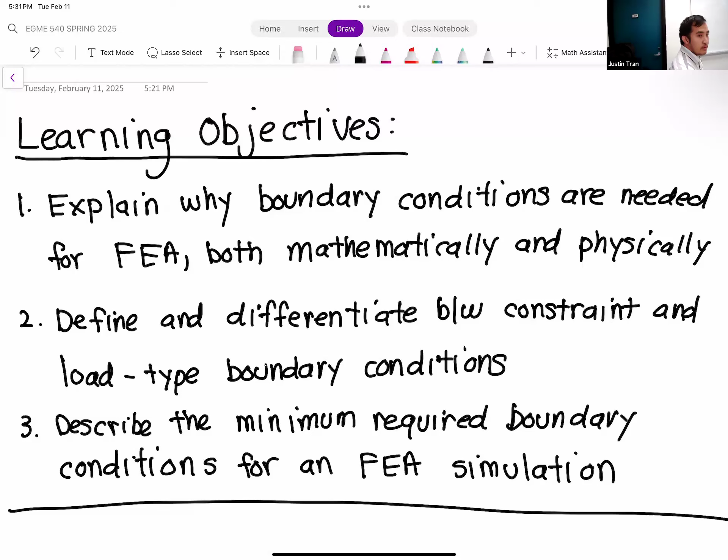Okay, all right, so let's go ahead and get started. So the topic for today is boundary conditions.

So, like I just mentioned, we're going through all of the basics that you need to even get started with FEA. Today we're doing boundary conditions, and Thursday we're going to be talking about material properties. Again, these are all things we've done in the activities, but I want to keep the activities rolling and we're catching up with the lectures. So last time we had a lecture, a week ago, we talked about meshing. So after you mesh your geometry for your finite element simulation, the next step is to apply boundary conditions.

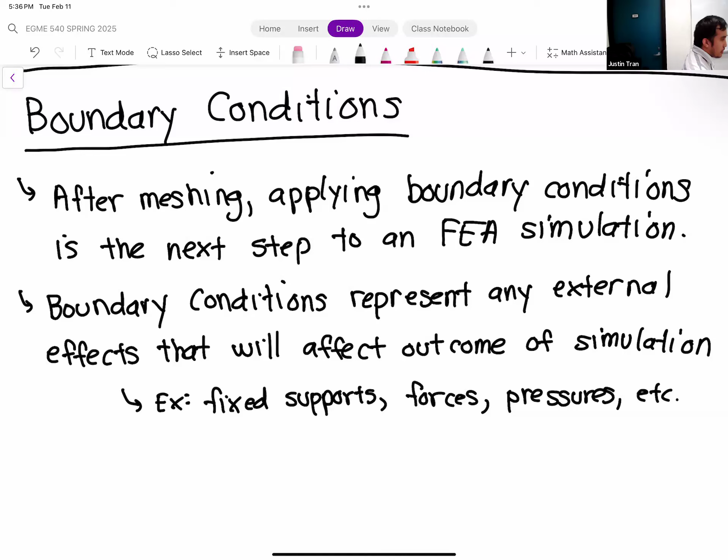I think that's a good place to start, because it kind of physically makes sense to people running a simulation. But boundary conditions actually serve a mathematical function as well. Mathematically, boundary conditions are needed to fully specify the solution to the differential equation that you're solving.

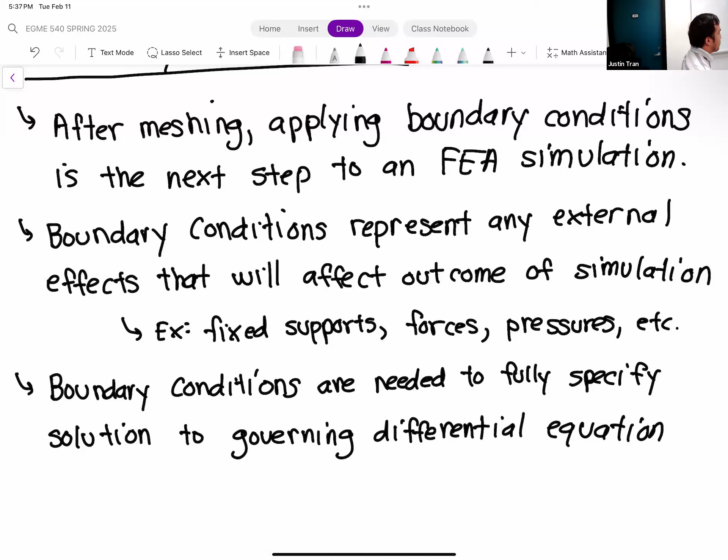If you think back to when you learned about differential equations, you always have to apply things like initial conditions or boundary conditions to solve for the solution. Let me show you an example — let's look at a very simple differential equation here.

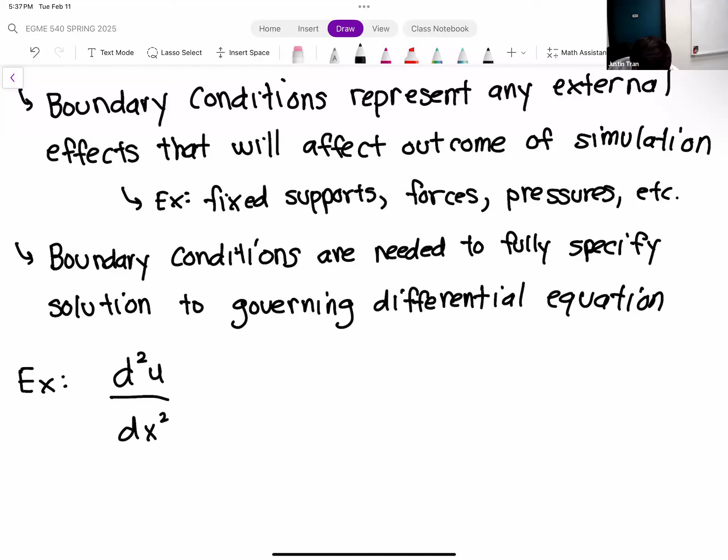So let's say we have d squared u dx squared is equal to 3x squared. A very simple differential equation. We don't even need the characteristic equation or anything fancy here — we can just integrate to find the solution.

If we integrate once on the left-hand side, we get du dx — that integral cancels out with one of the derivatives on the left-hand side. On the right-hand side, we take the integral of 3x squared, so that's going to be x cubed, using the inverse power rule.

But since we're performing an indefinite integral here — an integral without a lower bound or an upper bound — remember, in these situations we have to add an arbitrary constant. We have to add a C1 to the solution here.

Okay, and then if we integrate this again, we can solve for u of x. If we integrate this again, we have u of x is equal to 1/4 x to the 4th plus C1x plus C2.

Don't worry, this class is not going to transform into a math class all of a sudden. I'm just using this as a quick example. ANSYS is the focus of this class, but I'm just bringing this up to show you the applications.

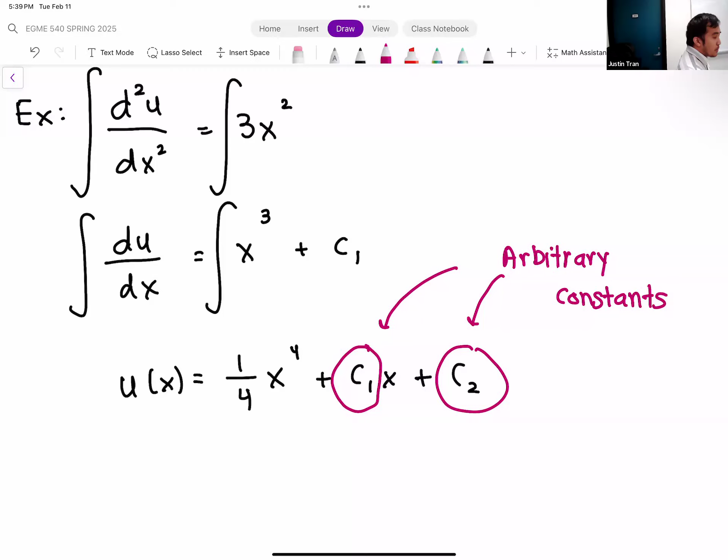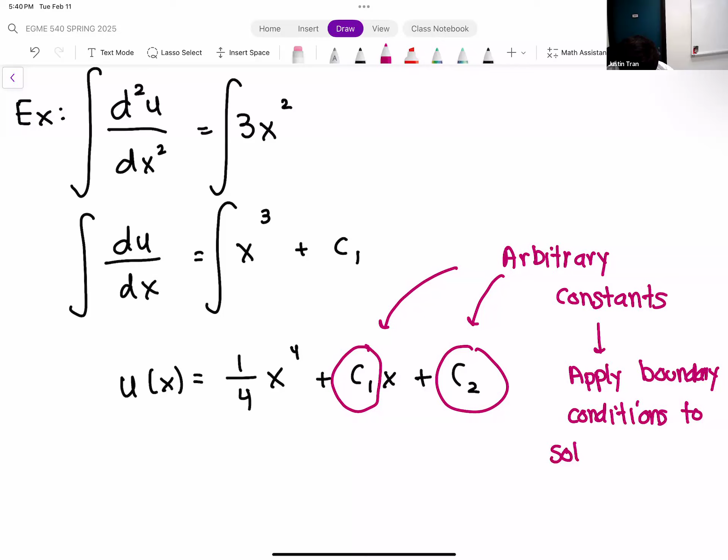And the way that we solve for these values is if we apply boundary conditions. For instance, let's say that we have a boundary condition: let's say u of 0 is equal to 18. In other words, mathematically what we're saying is that when x is equal to 0, the function u must have a value of 18.

So we're basically forcing this to happen. We're saying that through this boundary condition, we're forcing this function to have a value of 18 when x is equal to 0.

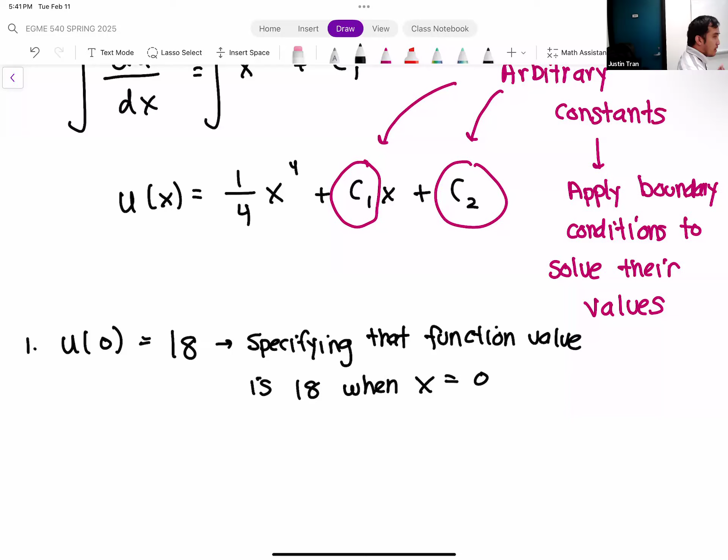So let's go ahead and plug it in and solve for one of the constants here. If we say u at x is equal to 0, I'm going to take my general solution above and plug in x is equal to 0. We have 1/4 times 0 raised to the 4th power plus C1 times 0 plus C2, and this has to equal 18.

Okay, so luckily this is pretty easy to solve because everything with the 0 is just going to cancel out. So we have 1/4 times 0 to the 4th power, that's going to go to 0. C1 times 0, that's also going to go to 0. So what we get from this boundary condition is that C2 must have a value of 18.

Okay, so we specified one of the values of our constants through this boundary condition. So now we know that C2 is 18.

All right, and then the other boundary condition that we have is, let's say du/dx at x is equal to 10. This is equal to -5.

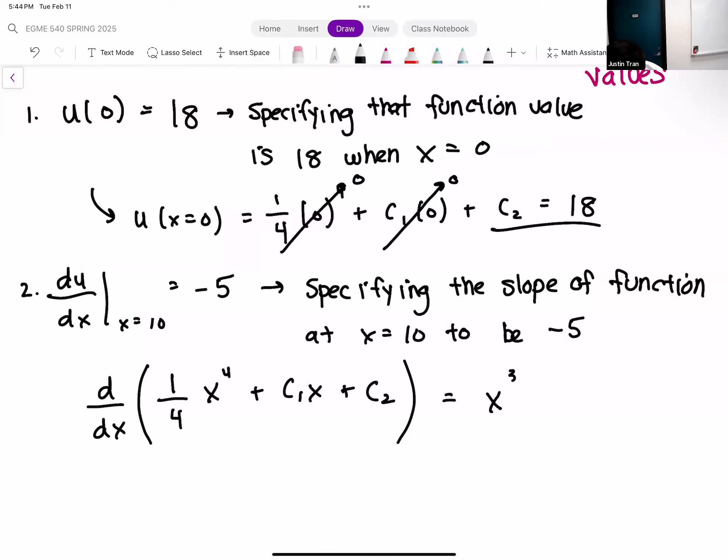Now we're going to plug in x is equal to 10, so we get 10 cubed plus C1, and this has to equal -5. 10 cubed is 1,000, so 1,000 plus C1 is equal to -5. And so we can see from algebra that C1 is equal to -1,005.

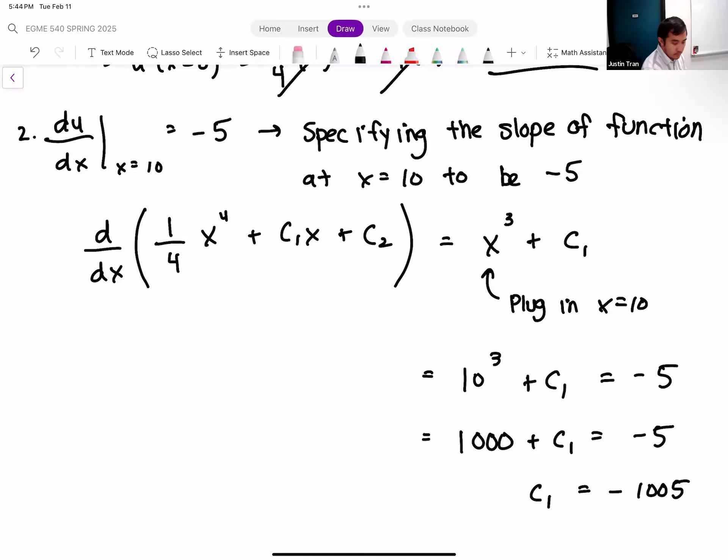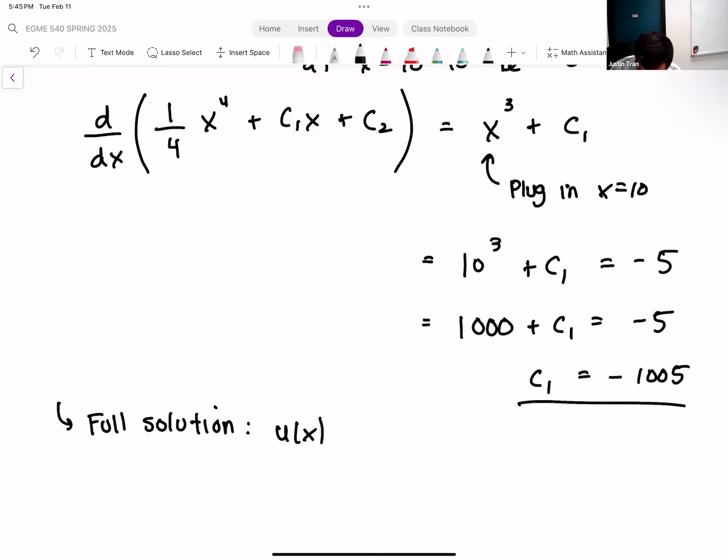Okay, and so if we plug both of these in, we get our full solution. We have u of x is equal to 1/4 x to the 4th minus 1,005x plus 18.

So in this problem, we can see that the boundary conditions played a very important mathematical role, because without the boundary conditions, we wouldn't be able to specify the values of our arbitrary constants C1 and C2. All right, any questions on this example here?

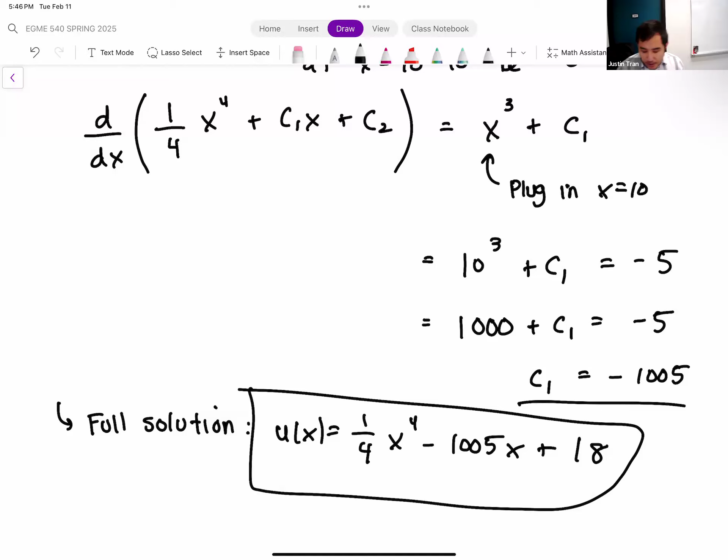Okay, good. All right, so I brought up this example kind of for another reason. If you notice from the two boundary conditions that I specified here, they do look different from each other. One specifies the value of the function itself, the other one specifies a value for the derivative. And that actually is kind of a good segue into the next part, which are the types of boundary conditions.

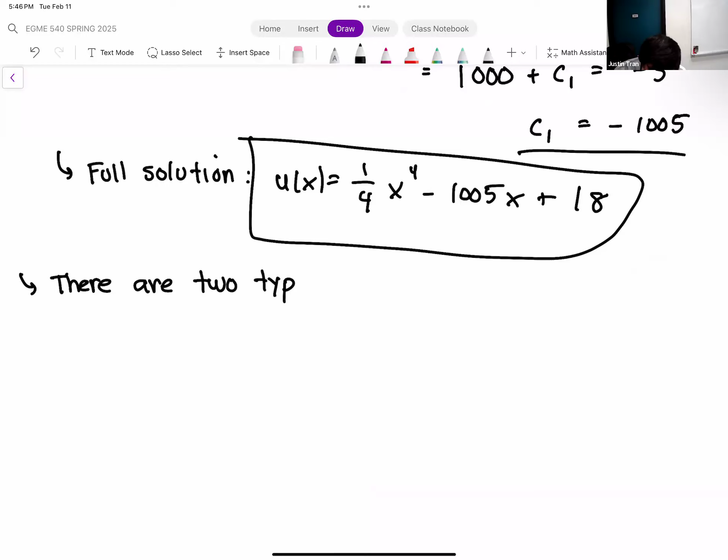So there are two main types of boundary conditions that we are going to concern ourselves with. The first type of boundary condition that we'll go over are called constraint type boundary conditions. Sometimes you'll hear me call constraint type boundary conditions Dirichlet boundary conditions. So Dirichlet is kind of the way that I was taught, but it's also not very descriptive in terms of what that is.

And if you've known me for any long period of time, one of my pet peeves in science in general is that every famous scientist wants to name the equation or theory after themselves. Like Bernoulli's equation or Newton's laws of physics, right? But I hate that because it doesn't describe to you what that thing or equation does, it's just very narcissistic of the scientist. So I hate it when scientists name things after themselves. So I'm trying to change things, so I'm going to try to call it constraint type boundary conditions, but I learned it as Dirichlet, so you might hear me kind of slip and say that every now and then.

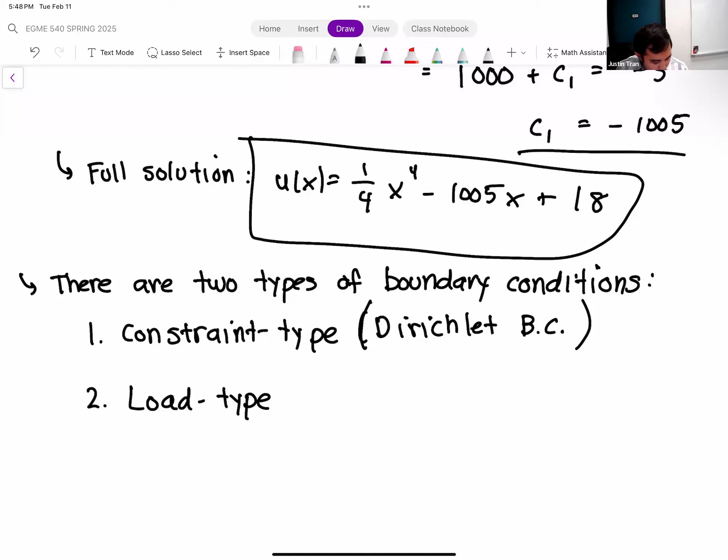Okay, the second type of boundary condition that we're going to go over are called load type. And the fancy name for load type boundary conditions are Neumann boundary conditions. Now, obviously, these are named after the people who formalized the theory behind it. So, Edward von Dirichlet and Jason Neumann - I just made those names up, I don't know what they're first names actually were.

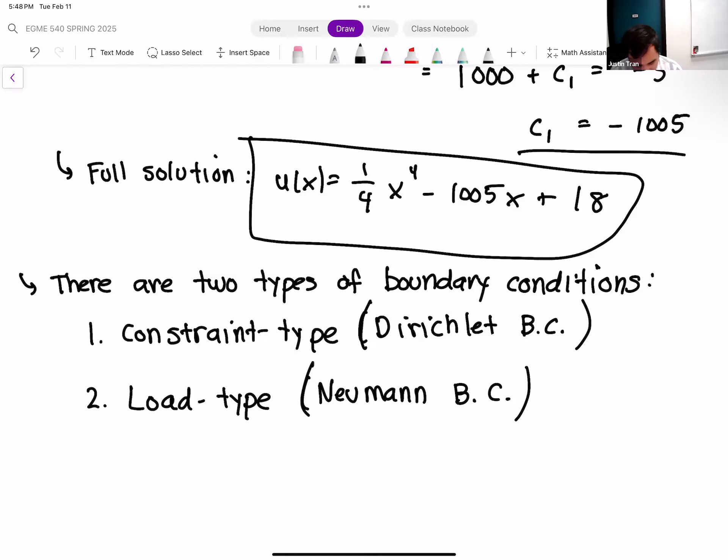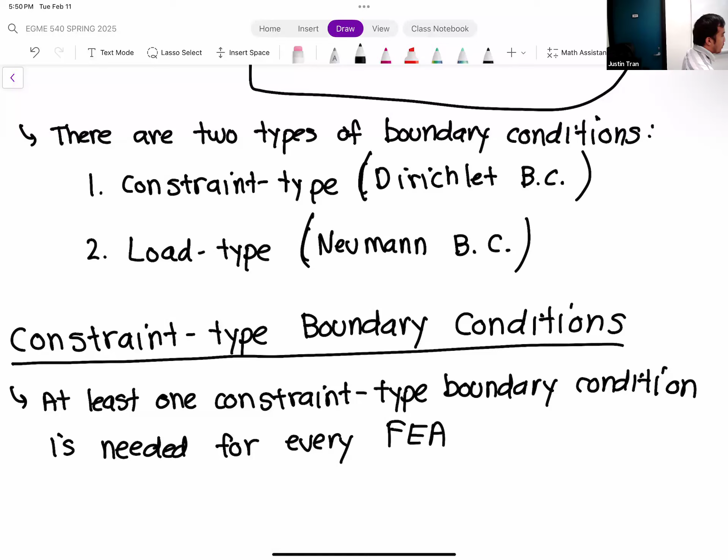Okay, so let's go over constraint type boundary conditions first. Constraint type boundary conditions are very important, they are needed in every FEA simulation. So every FEA simulation that you run, you need at least one constraint type boundary condition. That's one thing to remember. And in fact, if you don't have a constraint type boundary condition in your ANSYS simulation, ANSYS actually won't even let you run the simulation at all. So what is a constraint type boundary condition? A constraint type boundary condition is basically one that forces the primary solution variable to hold a certain value.

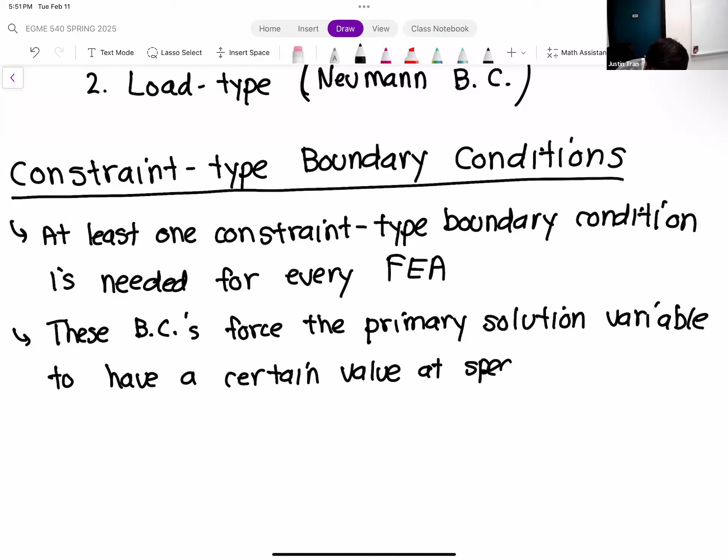Remember, we discussed a few weeks ago this idea of a primary solution variable. Every type of FEA simulation has a variable that's solved for first. For a structural simulation, the first thing that's solved for is the deformation. So we say that deformation is the primary solution variable for structural simulation.

Other examples of the primary solution variable: for a heat transfer simulation, the primary solution variable is temperature. For a fluid flow simulation, the primary solution variable is velocity. For every type of simulation you're running, it's good to be aware of what the primary solution variable is. For this class, for most of what we'll do, it's deformation.

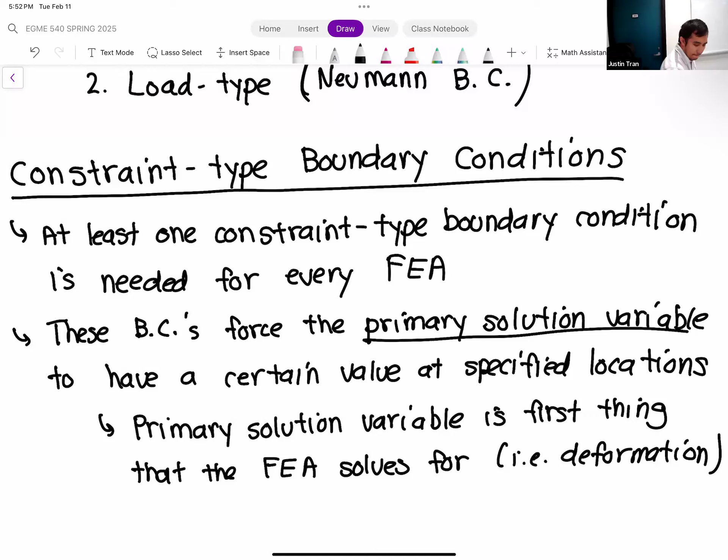A constraint type boundary condition basically enforces or forces the deformation to have a certain value at whatever locations you specify. We've used a constraint type boundary condition in both of our activities so far. It's also the most common one you'll use in all your simulations, which is a fixed support.

A fixed support boundary condition is one where we're basically enforcing or forcing the deformation to be zero at the locations where we specify the fixed support.

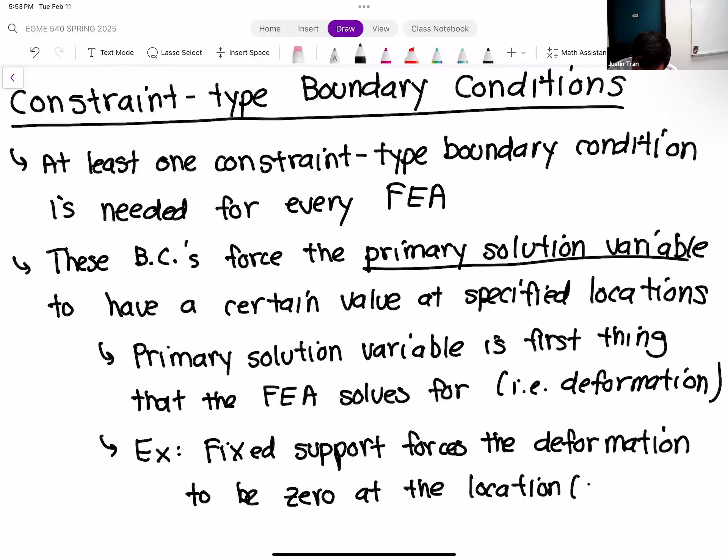That's probably the most common example of a constraint type boundary condition. Fixed support forces the deformation to be zero, and zero is a valid value. Any boundary condition that forces the primary solution variable to have a value, and you directly specify that value, so you have to be in control of what that value is, that is a constraint type boundary condition.

Linking back to the example we did earlier today, one of the boundary conditions we used was a constraint type boundary condition. If you look at the first boundary condition, u of 0 equals 18. Here our primary solution variable is u, that's the first thing we're solving for in the problem, that's what our solution turns out to be. So with this boundary condition where we're forcing the value of u to take on a value of 18 when x is equal to 0, this is kind of the textbook definition of a constraint type boundary condition.

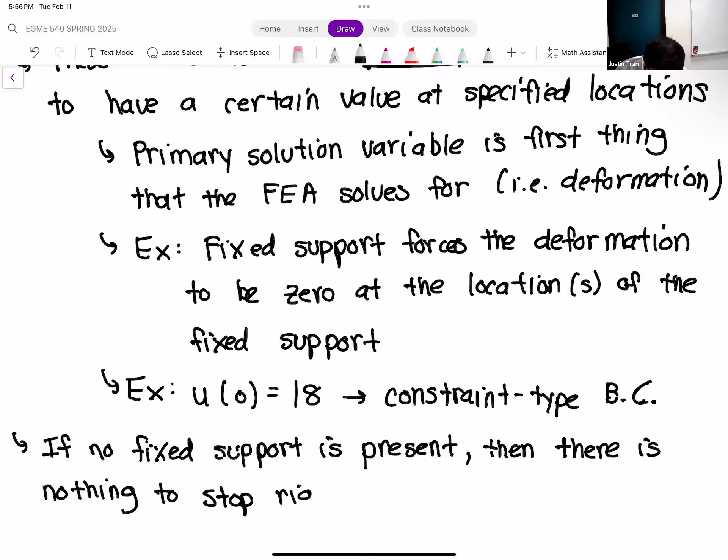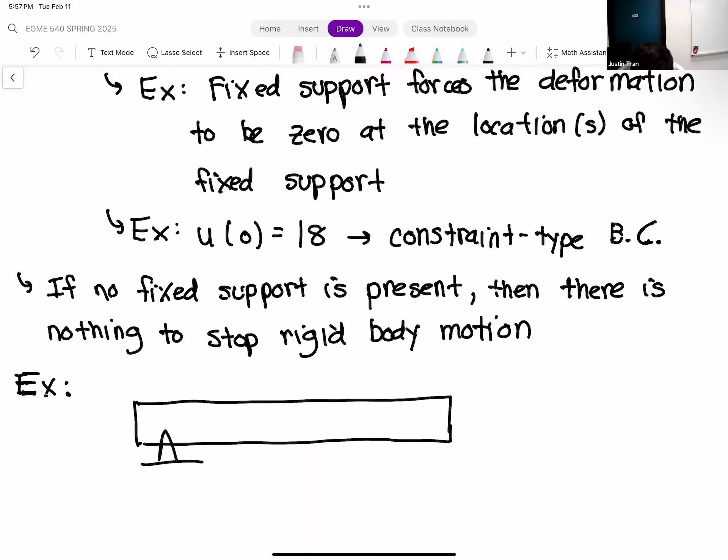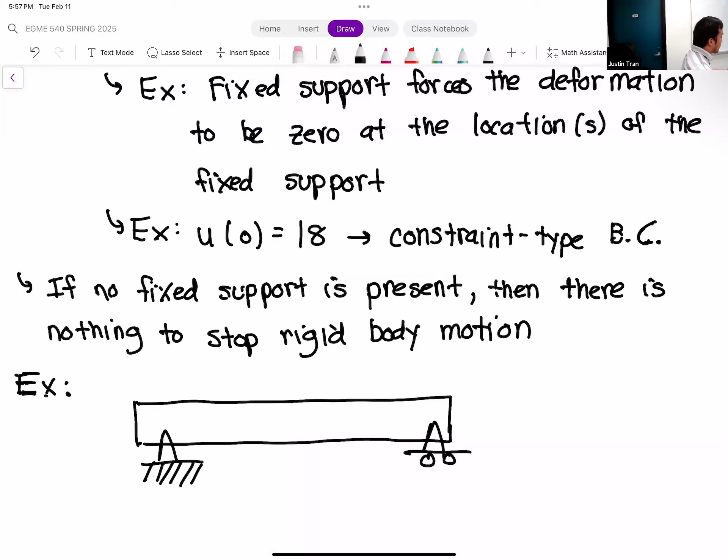For example, let's say we're doing a very simple simulation of a beam. A beam looks something like this. Normally the beam is fixed to the ground with some kind of pin support or fixed support, we'll say it's a pin support here. The other side can be a roller, that's fine. The fact that the support on the left is fixed to the ground prevents this entire beam from moving and translating.

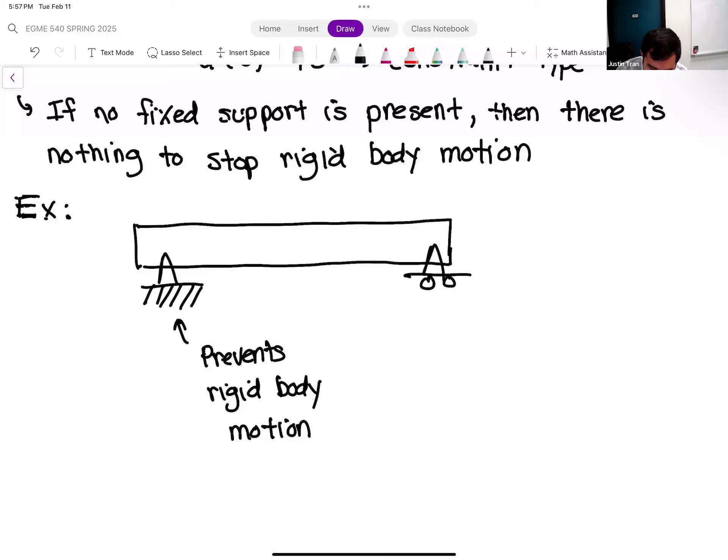If we apply a force going in this direction, the beam would deform. Because of the roller support on the right, the entire beam should compress and kind of squish, but the entire beam is not going to roll away or translate away because of that fixed support.

When you're running your simulations, it's usually hard to forget, but it's important to remember the role it plays. Make sure you always have at least one fixed support. If you don't have a fixed support boundary condition in your simulation, ANSYS will throw a fit and tell you that you can't do this.

There are other ways to fix your model, so you don't explicitly need a fixed support. But there needs to be enough constraints on the model itself to prevent any kind of rigid body motion.

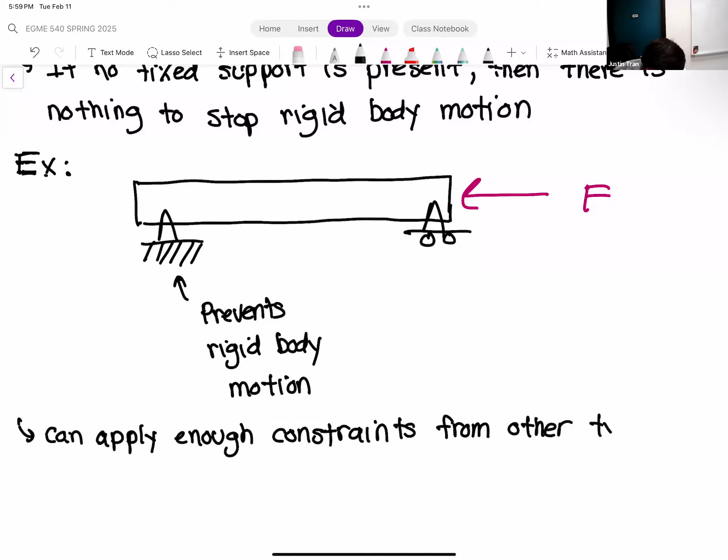So it's possible to provide enough constraints from the other types of boundary conditions. Technically, you can actually do it with force loads as well, but normally it's very difficult, especially for more complex cases. But there is another type of constraint boundary condition that you can do. We're not going to use it too much in this class, but sometimes it makes sense for certain applications.

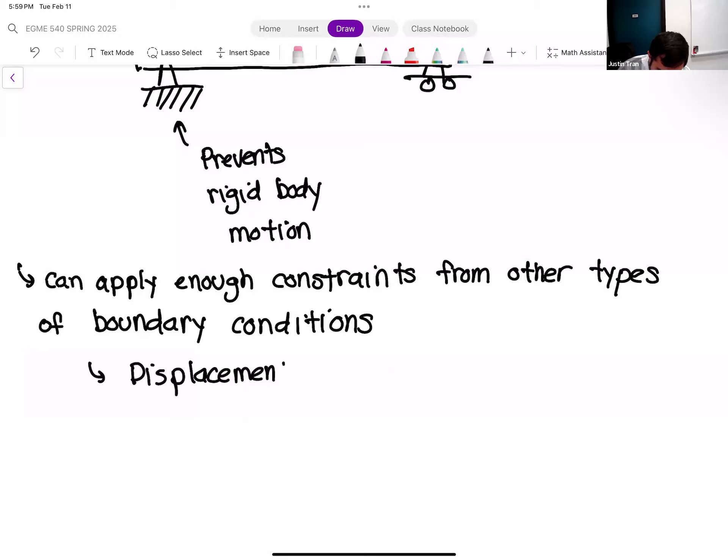So another constraint type boundary condition that is available in ANSYS that does make sense in some situations is what's called displacement boundary conditions.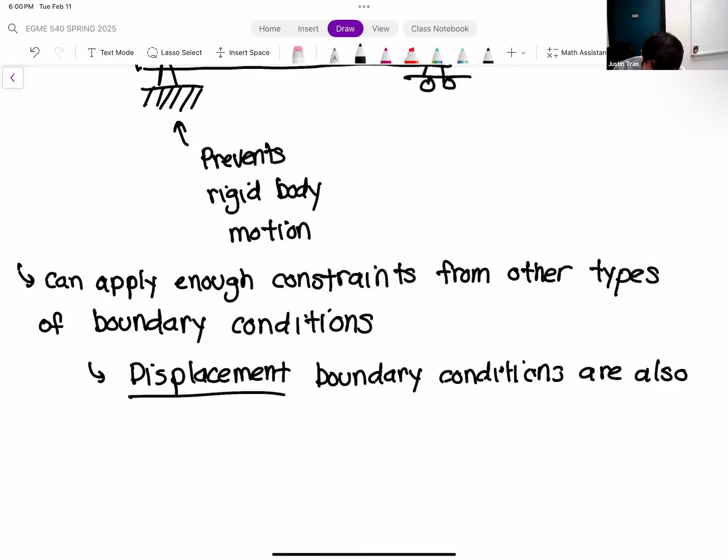So it is possible to use all constraint type boundary conditions to fully constrain your model. It's just a little bit more complicated. So the simplest thing is usually to apply a fixed support. And a lot of times physically that makes a lot of sense too when you're thinking about how your model is kind of fixed in reality.

But sometimes it doesn't. And so actually, a few people asked me last week, instead of a fixed support, what if we apply a cylindrical support or a displacement support on the three holes that fix the bike rack? And yeah, that's definitely possible. So some situations may call for certain things, but usually a fixed support is kind of the simplest way to accomplish this.

Okay. Any questions on this so far?

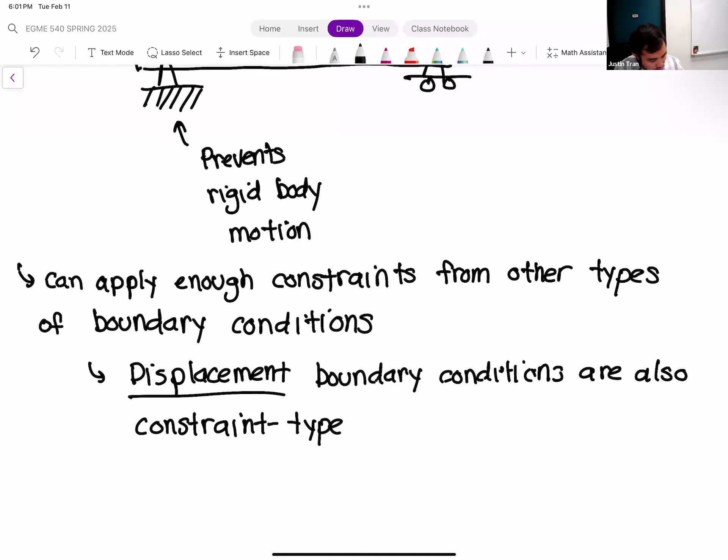Okay, so that's constraint type boundary conditions. Let's move on to the next type, which are load type boundary conditions.

So load type boundary conditions, the majority of the other boundary conditions available to you in ANSYS fall into this category of load type. It's kind of hard to come up with a definition that encompasses everything, but the best one I came up with is just any kind of external effect that's going to have an indirect impact on your primary solution variable. I count those as load type boundary conditions.

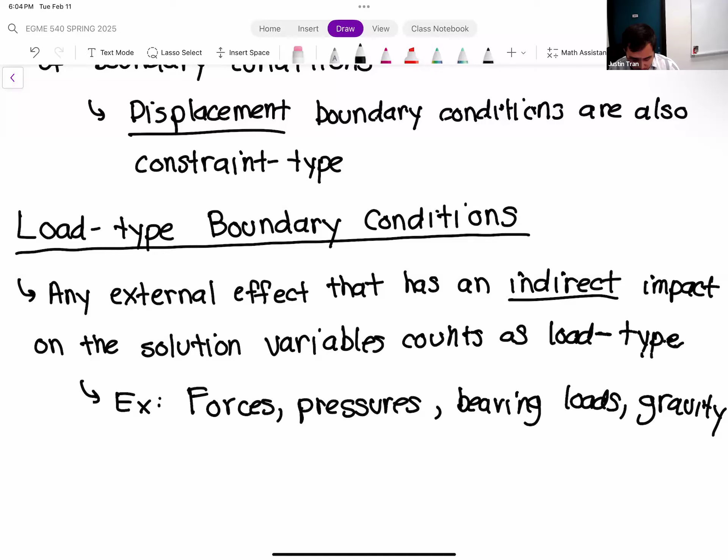But the exact relationship between the force applied and the resulting deformation is not 100% clear, right? Versus when you apply a constraint type boundary condition, you apply a fixed support, you know exactly what the deformation is going to be. It's going to be 0, right? So any kind of external effect that has an indirect impact on the solution variable, I count as load type.

Okay. So the most common way that this is applied mathematically is that these kind of take the form of a derivative. And so, if you remember from the example we did earlier today...

we did have one example of this, which was the second boundary condition. Okay.

Right, so if you remember from that example, we had another boundary condition of du/dx at x equal to 10, equal to -5. Right. So of course, this boundary condition is going to have an impact on the value of u at the boundary, but the exact effect is kind of indirect. And it's indirect in the way that we're doing it by specifying the derivative instead of the value of the function itself.

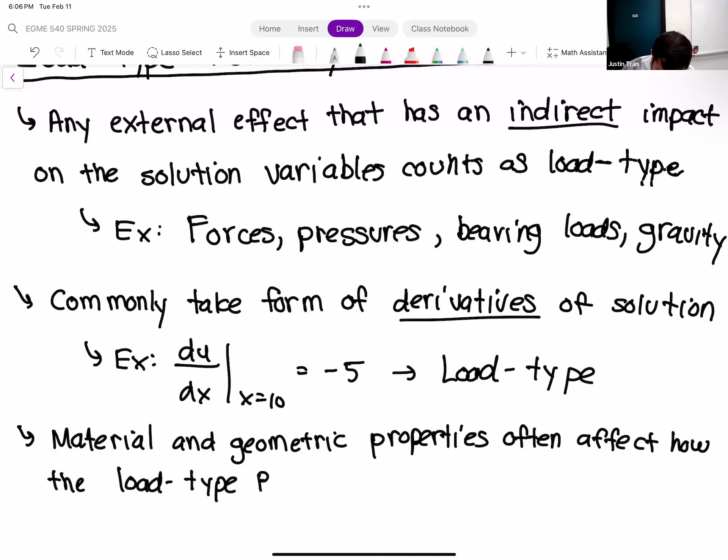That's different from the constraint type boundary conditions, because constraint type boundary conditions are going to have the same effect no matter if you're doing it for steel, or feathers, or plastic, or whatever, right? The constraint type directly specifies the solution here. But for a load type, because it's indirect, it's going to be affected by the material properties or the geometric properties, right?

For example, let's say that we have a beam here. It's going to be fixed on one side. If this beam were made of steel, you can apply a force again. Let's say we're applying 100 pounds. So the 100-pound force here, that would be our load type boundary condition. And for a steel beam, with 100 pounds, if it's casted well, it's not going to deform all that much, right?

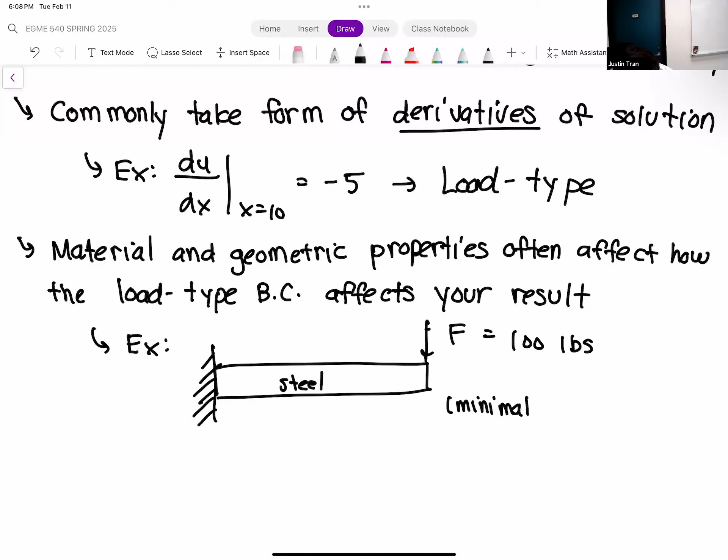Versus if you apply the exact same load type boundary condition to, let's say we have a beam here, same geometric properties, but let's say it's made of plastic instead—the cheap plastic that's made out of your water bottles. If you take 100 pounds and apply it to a water bottle, it's probably going to break and crumble. So the exact impact of the load type boundary condition often depends strongly on the material properties of the subject.

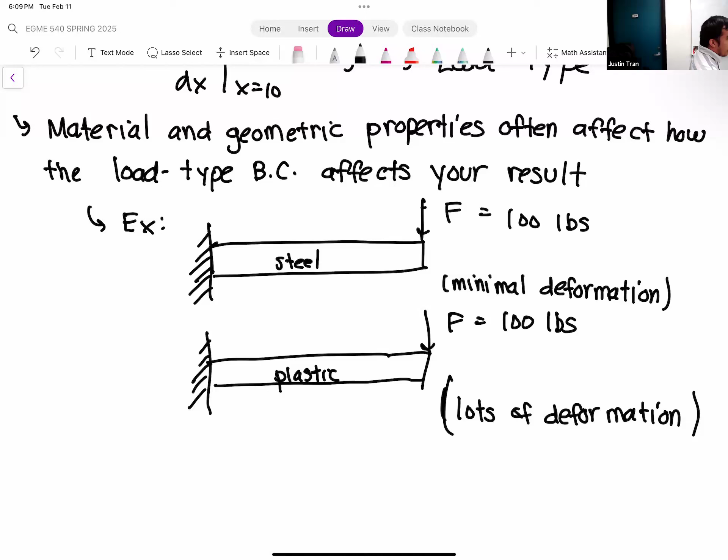But that's not the case for a constraint type. No matter what, in both cases we have a constraint type boundary condition there. Whether we have steel or plastic, the left side of these structures is not going to move because we have a fixed support. In both cases, the fixed support is applying the same effect because constraint types don't really care about material properties, but load types do.

Any questions on this so far? So strictly speaking, a load type boundary condition is not a requirement to run an FEA. You can run an FEA simulation without a single load type boundary condition.

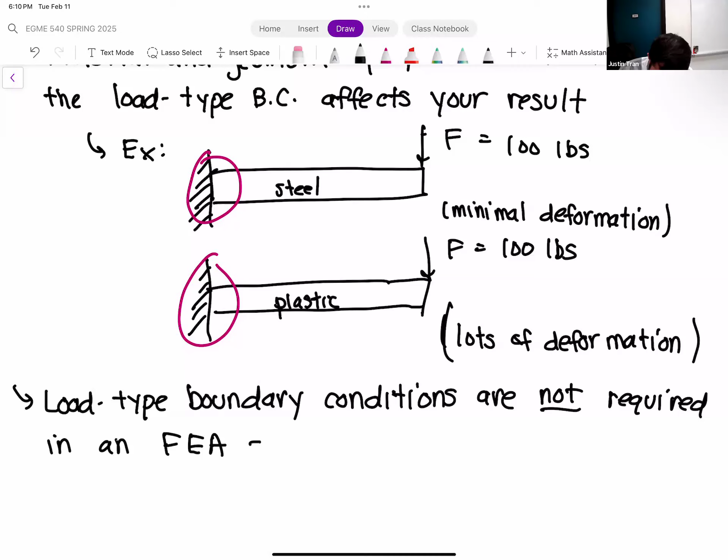Remember I mentioned earlier that you can run an FEA simulation with displacement type constraints? So if you run your simulation and all of your constraints—you have a fixed support and a displacement type boundary condition—you can actually run a simulation on that. There won't be an error, and ANSYS will let you run it. So that means you can run a simulation without any loads at all.

Now, for the most part, for most simulations and physical applications, you're going to apply a load naturally, just because that's kind of how we think about and model these situations. So a lot of times, especially with the activities and projects, you're going to have a load type boundary condition that just comes out naturally. So it's likely going to be there, but strictly speaking, a load type is not required for a solution, unlike the constraint types.

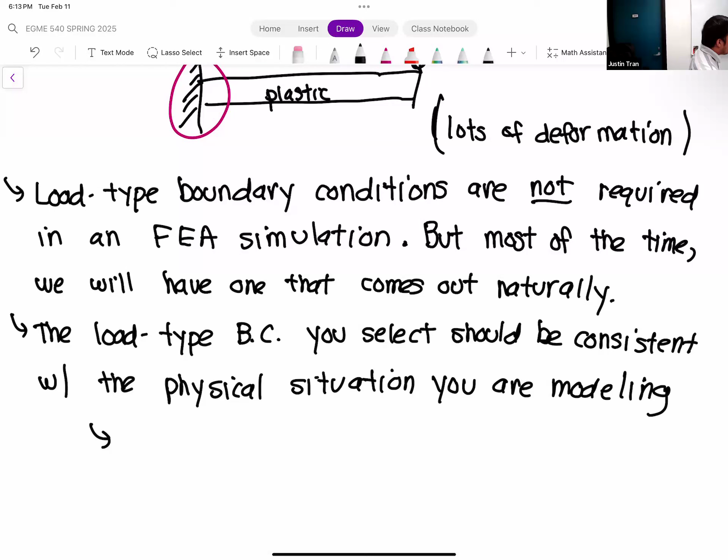Some of you have already thought about this because I've talked to some of you. This is the decision of whether you use a force boundary condition or a pressure boundary condition. You can achieve the same results with a force boundary condition applied on a certain area and a pressure boundary condition applied on the same area. You can get the same results for both, but which one makes more sense with how you intuitively understand your model? It's going to be different.

So for the previous activity we just did on the bike crank, a force boundary condition makes a lot of sense because when we think about applying a force on a bike crank, we think of it in terms of pounds and newtons. Versus another application, maybe you're thinking about the force that a pressurized pipe is going to be exerting on a pipe wall—in that situation, you think of the loading in terms of pressure more so than force.

So there's no one load type that's better than the others for a general situation. There may be some that are more niche. Someone asked me last time about what a bearing load is, and a bearing load would actually be pretty good for some situations. Just think about the physical situation you're trying to model and what makes the most sense in terms of how you incorporate this into your FEA.

All right, any questions on this so far? Okay, so for the last thing we're going to talk about today is some practical considerations for applying your boundary conditions.

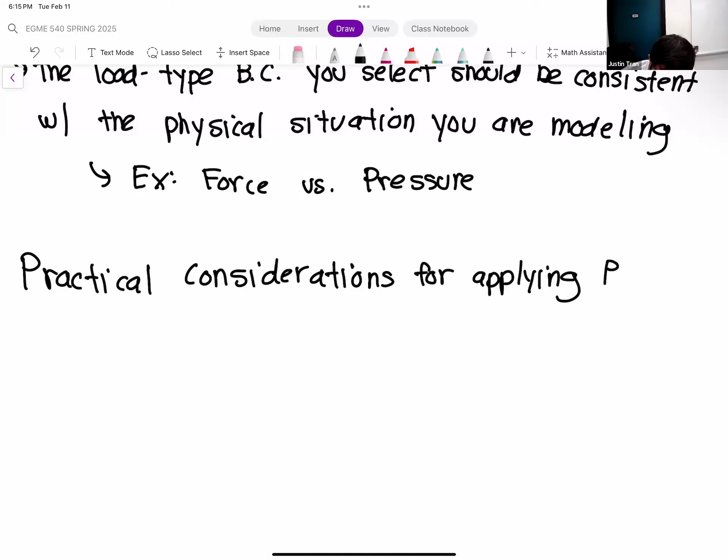So now that we know the purpose of boundary conditions and the different types that exist, for this class where we're mostly focused on how to use ANSYS in a professional and practical way, when we think of boundary conditions, you want to do them in a way that makes sense and won't lead to errors. Ultimately, the idea is you should apply boundary conditions that best match or are most consistent with the physical situation you're attempting to model.

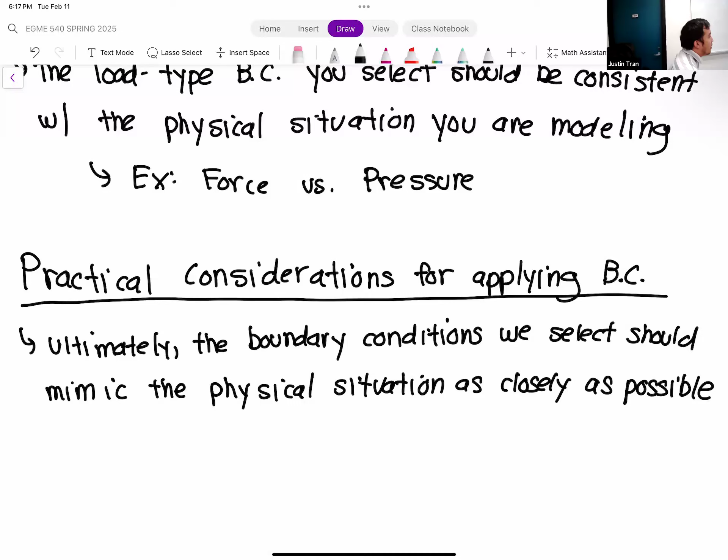ANSYS will run your simulation, but it's not going to tell you there's an error or that something's wrong, because the assumption ANSYS makes is that when you apply boundary conditions, you've thought about it and know exactly what you're doing. ANSYS just gives you the result of whatever boundary condition you apply, so there's no obvious error.

Besides the obvious, like making sure you have a fixed support—if you don't, ANSYS will tell you that—besides that, there's no error message when you apply boundary conditions incorrectly, because it's mostly human error.

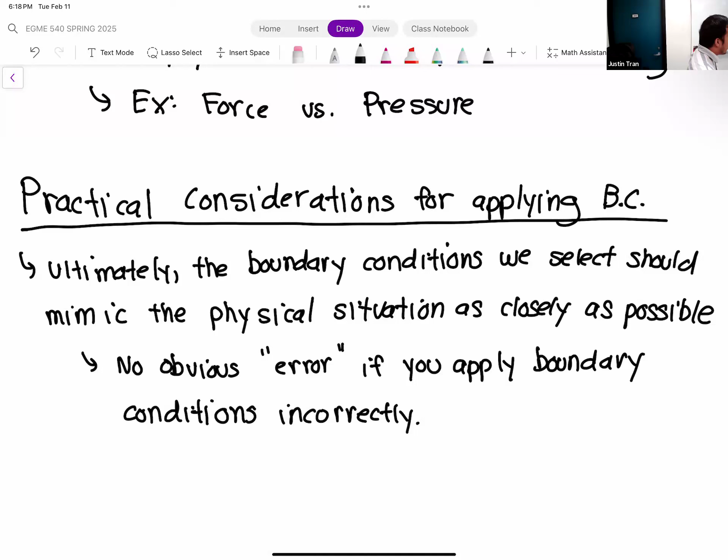For example, think back to our bike crank. We have our bike crank that looks roughly like this, with three holes on this side that are fixed. If you apply the force in this direction, that's what we concluded at the end of the activity last time—applying the load in the y direction is going to maximize the amount of stress, because we're putting it in bending.

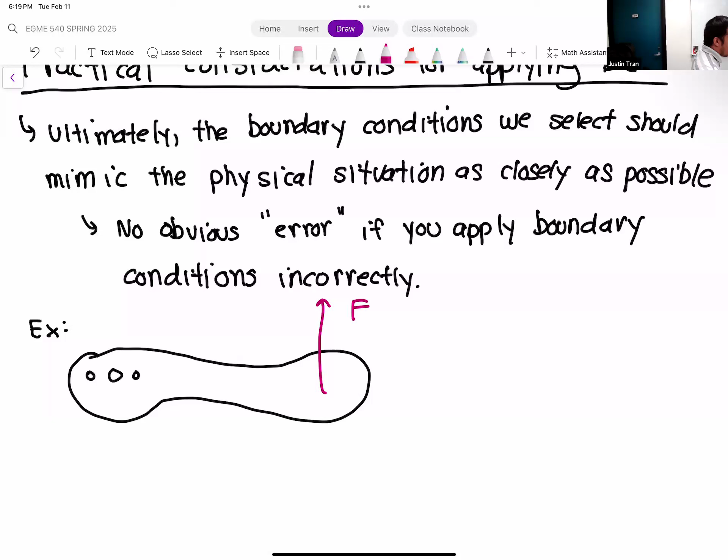Versus, if we take the same bike crank with our fixed supports here, if you apply the load in an oblique manner—let's say diagonally like that—

ANSYS will look at both of these situations and say, yeah, this looks great, I'm going to give you the simulation results for both. But we know, based on our intuition, that the situation on the right is not the most dangerous situation—it's not consistent with the goal of our simulation, because this isn't going to have the maximum amount of stress.

So I'd say the situation on the right has incorrect boundary conditions, because it's not consistent with what our goals for the study are, which are to find out what the maximum stress is in this bike crank possible.

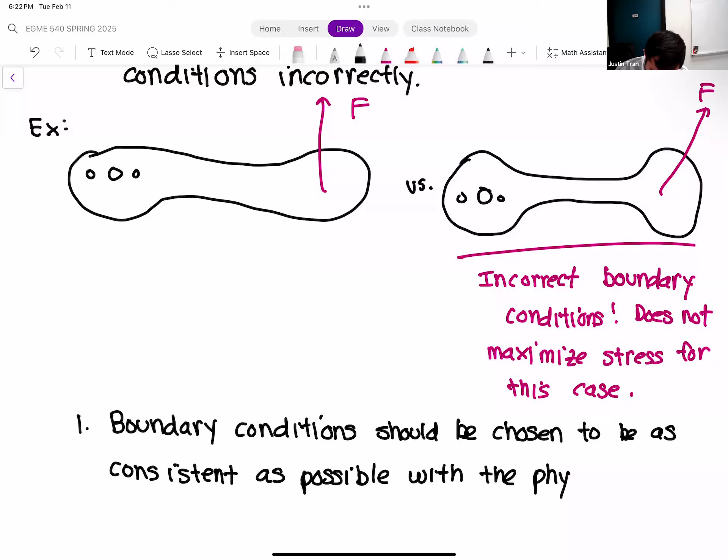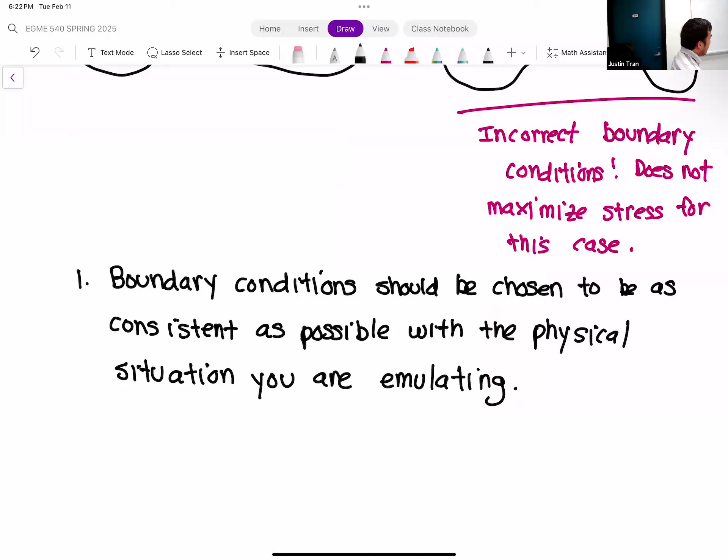Every single force that's going to be applied onto your system, every single source of pressure, every single constraint, fixed constraint, displacement constraint, you want to make sure you include all of it in the boundary conditions. Otherwise, if you don't include everything, or you choose the force value or direction incorrectly, the results you get are not going to be reliable.

For a lot of practical situations on very complex geometries with complex loading, besides the meshing—which is usually the most frustrating—engineers usually spend a lot of time thinking about how to apply these types of boundary conditions.

I will say that a lot of times there is no best way to do this. For all the situations we're going to be doing in this class, it's usually pretty obvious, just because I tell you to apply forces in certain places. But for a lot of situations, it's not going to be as straightforward.

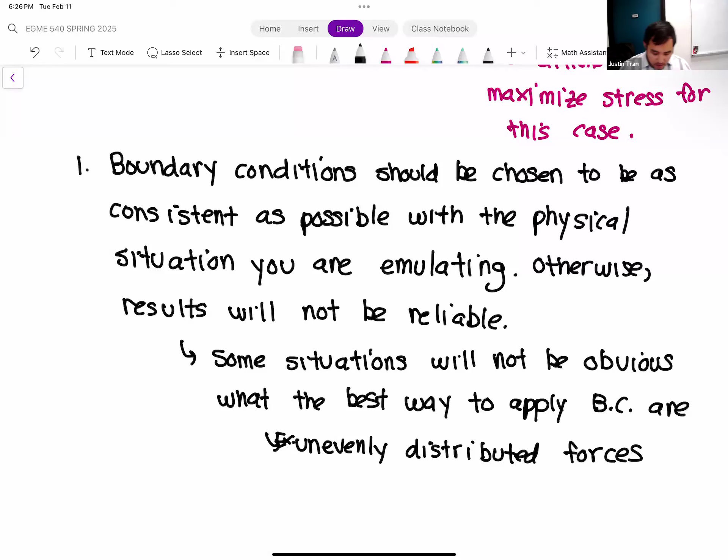Any questions on this so far? Okay, number 2. The number 2 practical consideration is that you do not need to apply a boundary condition on every single surface of your model.

Again, this one might be obvious, and hopefully something you picked up from our last two activities, but we did not apply a boundary condition on every single surface. That doesn't mean one's not needed there. Mathematically and technically speaking, every single surface on an FEA model needs to have a boundary condition in order for it to be solved. But that doesn't mean that you have to explicitly apply one.

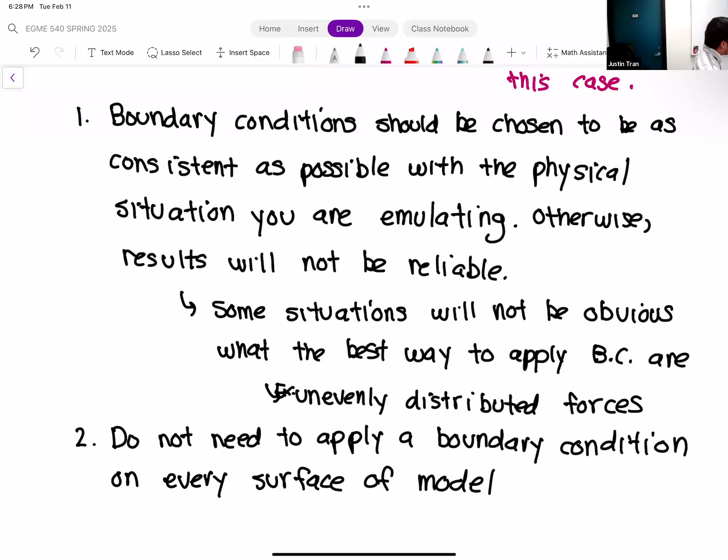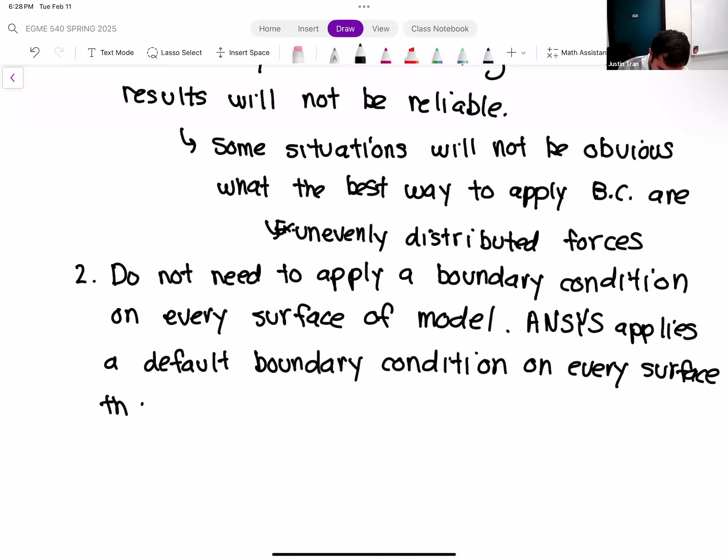So if you don't apply a boundary condition on a particular surface, then ANSYS will apply one by default. And what is that default boundary condition? It probably does exactly what you intuitively are thinking—it's called the stress-free boundary condition.

The stress-free boundary condition basically says that there's no external effect—there's nothing pushing against it, there's nothing constraining it, and so the external force there is essentially zero. Mathematically, that is actually important to solve the equations, because there's a term in the FEA equation that does that. But that's just kind of for your information.

So if there's no external effect, or no force or anything contacting your model at that certain point, just don't apply any boundary condition there, and ANSYS will apply the stress-free boundary condition. That's nice because it lets you focus just on the places where you do have some kind of external effect, and you can incorporate that in the boundary.

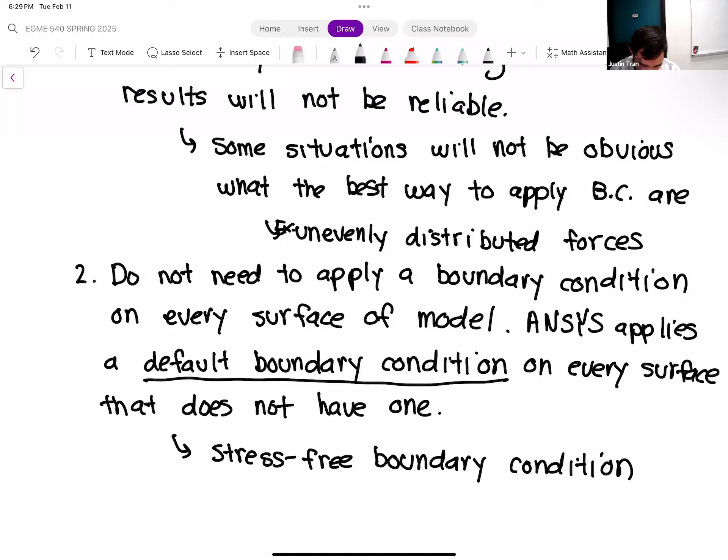Okay, number 3. The number 3 piece of advice is to apply the boundary condition on as wide of a surface as possible.

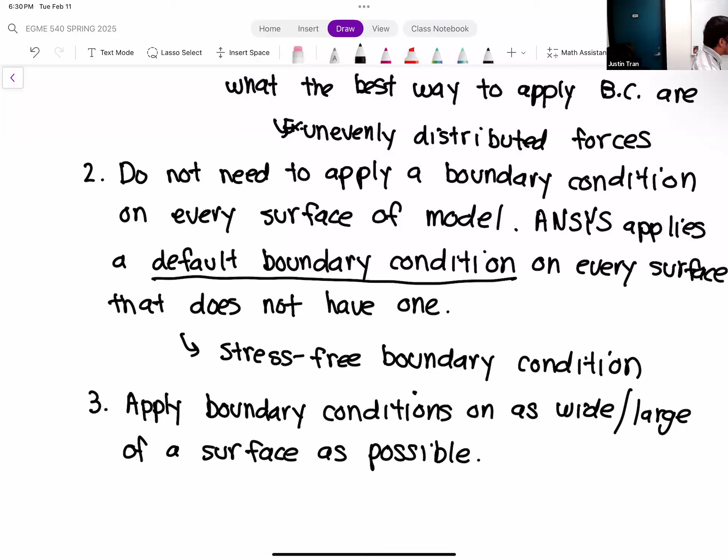Of course, within reason, so don't apply anything on a large surface if it doesn't need to. Generally, if you have the option to apply the boundary condition on a face versus an edge versus a point, a face is more preferable than an edge, and an edge is more preferable than a point.

I mention this because sometimes when we think of boundary value problems mathematically, forces are often applied at a point, so intuitively you may want to apply a point load onto an FEA simulation. Generally you want to avoid it because when you apply a force at a point, you concentrate a ton of force or load at a singular point in your mesh, and if the loading is high enough, that can cause numerical issues.

Same thing for an edge. So if you can, try to apply all your forces on faces. It can be a very small, narrow face, but almost anything is better than an edge or a point, because sometimes it can cause issues, and you want to avoid those as much as possible.

Now this doesn't mean you apply a force in the wrong location just trying to put it on a face. If it makes sense, like you're only applying a force at the very tip or end of the model, sometimes physically it makes the most sense to use an edge or a point. So don't distribute a force over a face just for this reason—you have to balance this with what makes sense physically versus what's easiest.

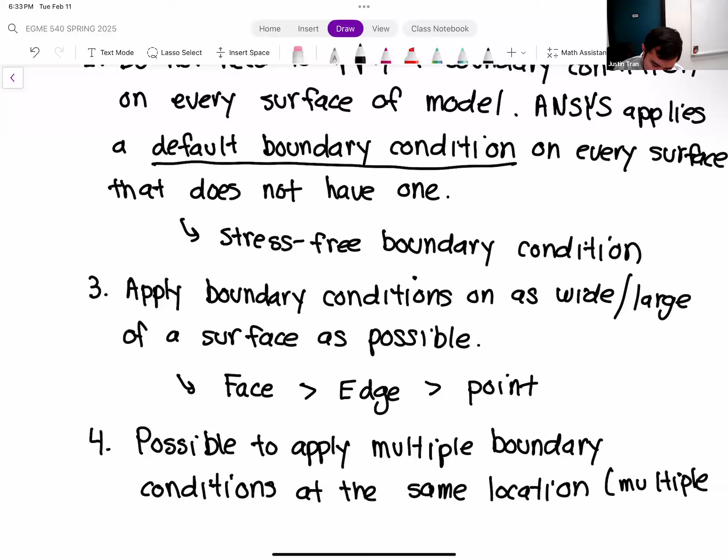So you're not locked to just applying one load to one location. Usually this is most common when you're applying multiple loads to the same place—in fact that is quite common, having multiple sources of loading. So you can apply it on the same surface, there's no exclusivity agreement here.

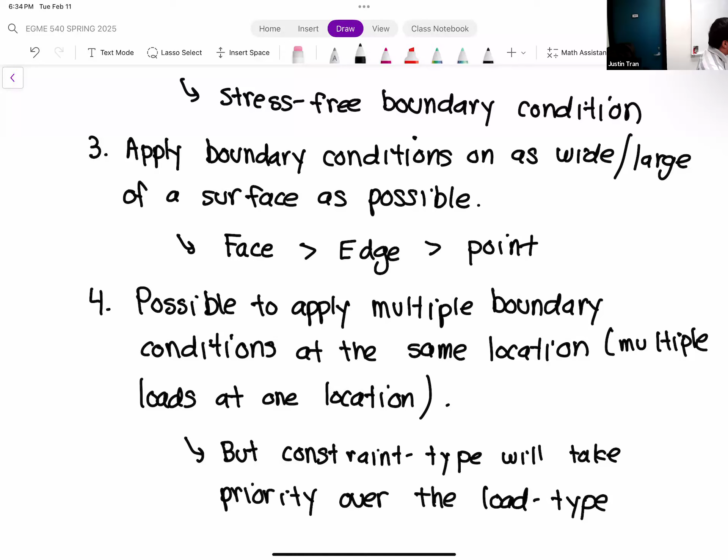But if you're going to apply a constraint boundary condition and a load type boundary condition at the same place, the constraint type boundary condition will kind of supersede or take priority over the load type. In fact, if you apply certain types of constraint boundary conditions, it may render the load type boundary condition completely useless. For example,

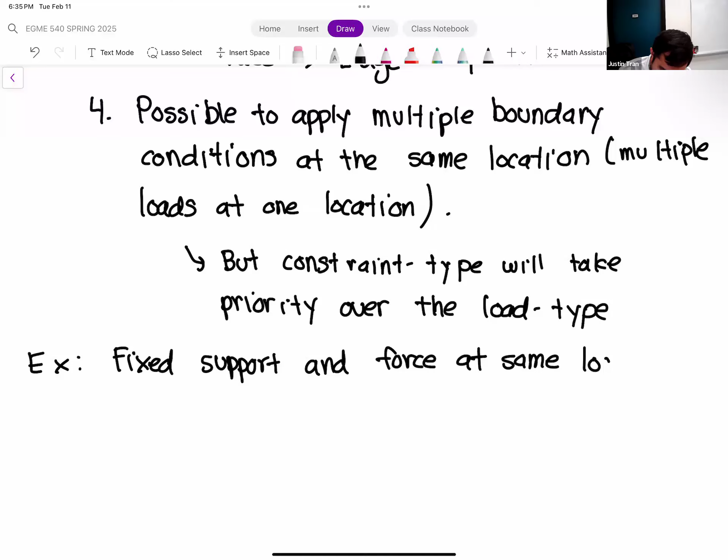let's say you apply a fixed support at the same location as a force. Say we have a beam with a fixed support here. If we apply a force right on top of the fixed support, that force is going to try to force the beam to deform downwards, but the fixed support there is saying that deformation is going to be zero here. So you kind of have an unstoppable force meeting an immovable object, literally, in this case.

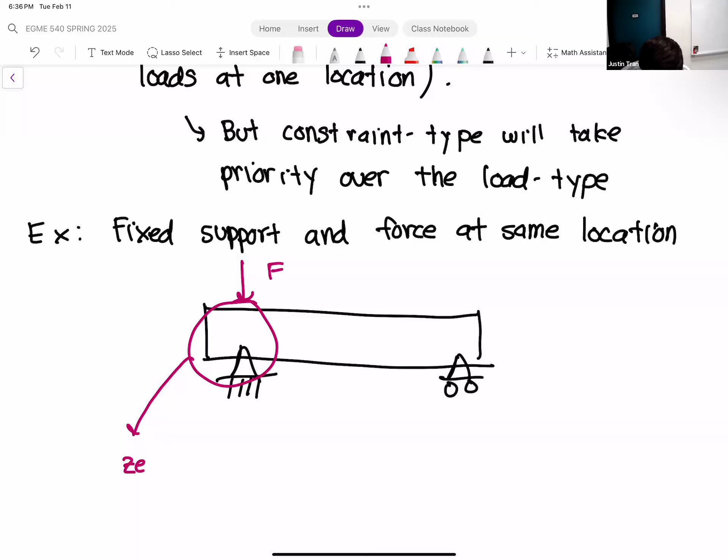But in this case, the immovable object is going to win. So your simulation results, when you look here, you're going to see zero deformation, because the constraint type boundary condition—the fixed support—is going to take priority over the force, over the load.

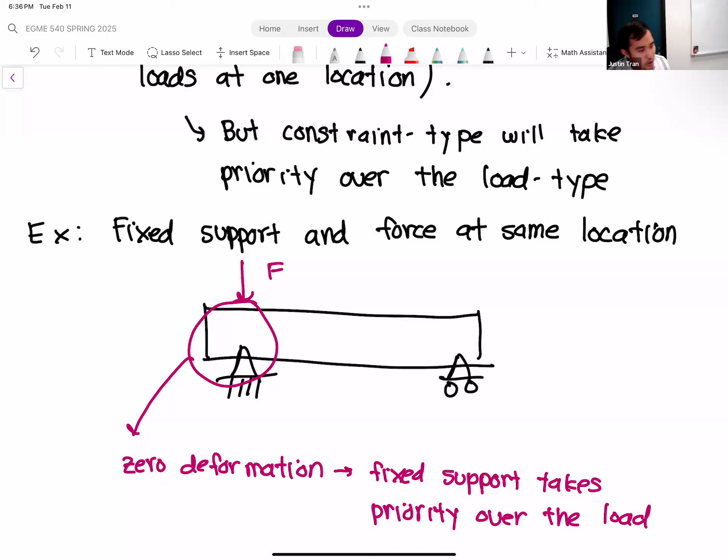So a lot of times you want to avoid situations like this. If you have a situation where physically you think there should be a force and a fixed support, or a force and a constraint applied at the same location, you may want to rethink how you're modeling your situation, because that force is effectively going to be useless—it's not going to be affecting much.